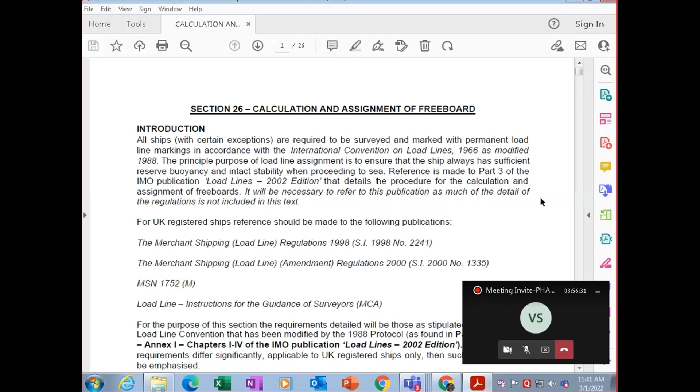Now the exemptions for your load line conventions: basically it's not for the warships. It is not for new ships of less than 24 meters length. It is not for existing ships of less than 150 gross tonnage. Pleasure yachts not engaged in trade, and fishing vessels are also exempted. Plus, exemptions can also be granted, like for your hatchless container vessels where you don't have hatch covers. So those are special exemptions.

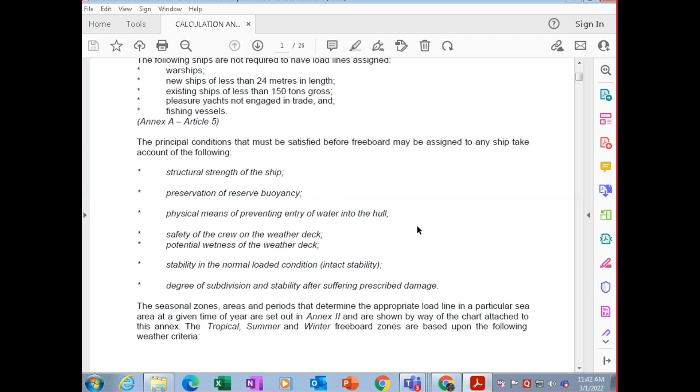Now the principal conditions which have to be satisfied before your freeboard is to be assigned: first, your structural strength should be properly there as per the class. Your reserve buoyancy should be preserved. You should have physical means of preventing entry of water into the hull. There should be safety to the crew on the weather deck.

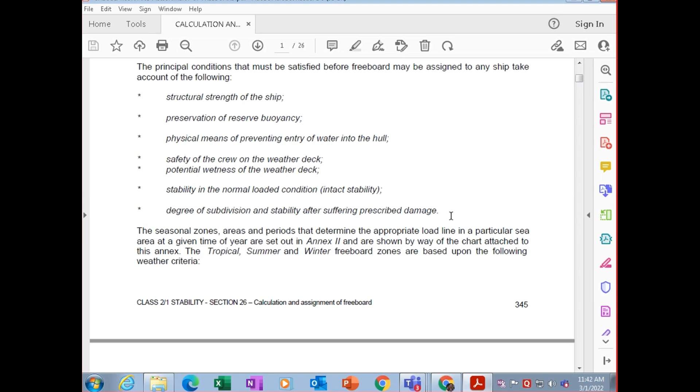The potential wetness on weather deck should be reduced. The stability in normal loaded conditions should be as mentioned in intact stability requirements. Then your degree of subdivision and stability after damage, or damage stability, should be prescribed. What is your damage stability requirement for that? And you should be confirming with that. And your seasonal zones, areas, and periods are to be determined for appropriate load line.

Accordingly, your tropical, summer, and winter freeboards are to be given as per the weather criteria. Your summer zones will be regions where not more than 10% of wind speed is exceeding force 8. Tropical zones are areas where not more than 1% wind speed exceeds force 8, and not more than one tropical revolving storm in a 10-year period occurs in the area of 5 degrees lat-long square in any one separate calendar month.

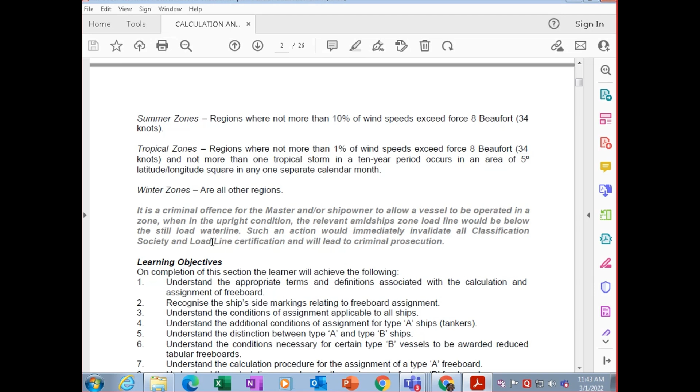And winter zone is all other areas. So your master or ship owner cannot submerge your relevant load line in still conditions, otherwise your class is going to invalidate your certificate, and that will lead to criminal prosecution. You should not submerge the relevant load line below your still load line water.

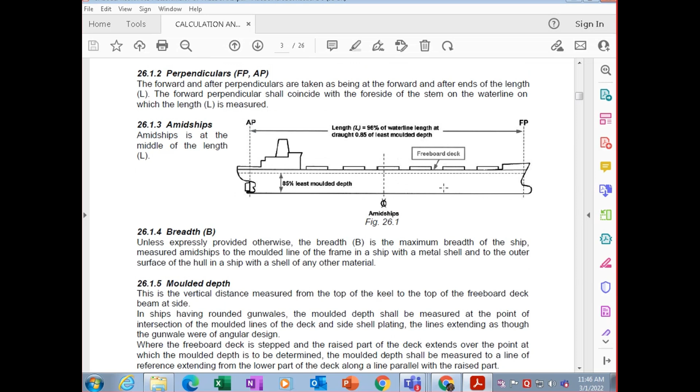B, or your breadth, is the maximum breadth of the ship measured amidships to the molded line of the frame in a ship with a metal shell, and to the outer surface of the hull with the shell of any other material. If it's a metal hull, then it is the molded line of the frame, meaning inside, and if it's any other material, it will be the outer surface of the hull - breadth maximum at midships.

What is molded depth? Molded depth is the vertical distance from the top of the keel. Top of the keel means above the keel, because the keel has a certain thickness, so from top of keel to the top of the freeboard deck beam at the side, not including the thickness - that is taking the thickness of the freeboard deck. So it's the top of the freeboard deck beam at the side.

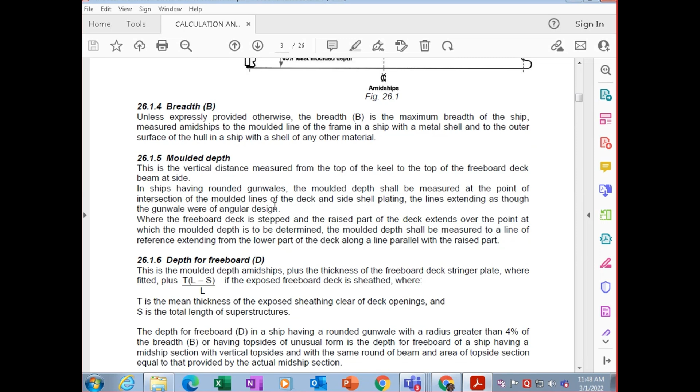So ships having a rounded gunwale, the molded depth shall be measured to a point at the intersection of the molded line of the deck and the shell plating, with the line extending as though the gunwale was an angular design. This means at this intersection, if this line stays straight and this one stays straight, at their intersection this point is where it is located.

Where the freeboard deck is stepped and a raised part of the deck extends over the point at which the molded depth is to be determined, the molded depth shall be measured to a reference line extending from the lower part of the deck along a line parallel to the raised part. So then it should be measured at the upper part - that is the line reference extending from the lower part of the deck to a line parallel to the raised part, and raised there.

Now we come to what is depth for freeboard. So depth for freeboard is molded depth amidships plus the thickness of the freeboard deck stringer plate. Let me tell you what a freeboard deck stringer plate is.

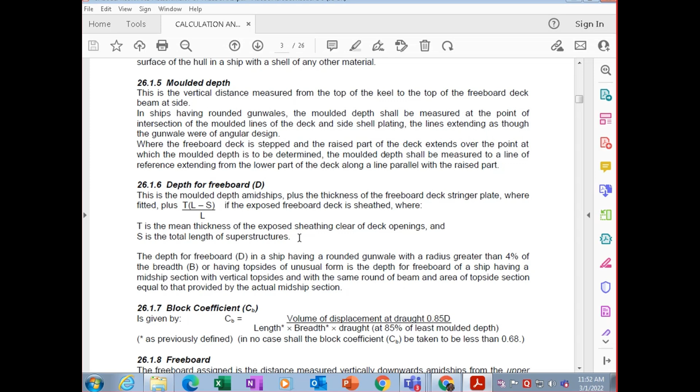Now the depth for freeboard having a rounded gunwale with a radius greater than 4% of the breadth, and having top sides of unusual form - top sides means where a bulk carrier has come, so that's rounded - plus its top side tank is of unusual form, with the depth for freeboard having a midship section of vertical top sides and with the same round of beam, and area of top side section equal to that provided by the actual midship section. So on top of that this difference will come if it has a top side tank.

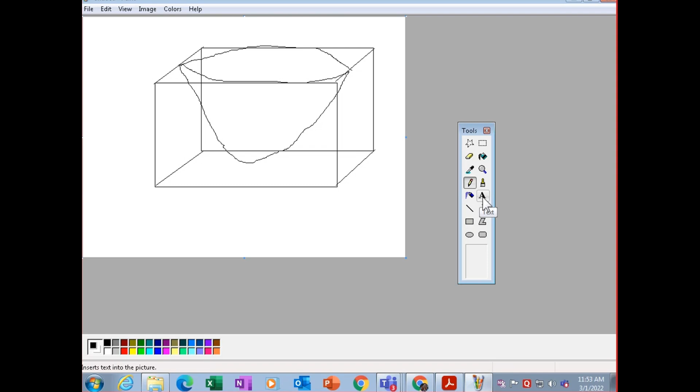लेकिन सपोज मैंने एक VLCC बनाया जिसमें ज्यादा से ज्यादा लकड़ी यूज हुई, तो ब्लॉक कोफिशिएंट हो गया मेरा 0.85। 85% मैंने लकड़ी यूज कर ली बनाने में। तो ब्लॉक कोफिशिएंट का मतलब है मैंने एक लकड़ी के ब्लॉक से कितनी ज्यादा मटेरियल यूज किया वो शिप बनाने के लिए।

पहले मैंने सोचा आपको लेमन वर्ड में समझाऊं, उसके बाद मैं फिर फॉर्मूला पे आऊं।

So block coefficient CB is volume of the displacement at the draft 0.85 of depth. 0.85 of depth मतलब 85% of depth for freeboard divided by LBP, length into breadth into draft, which is at 85% of least molded depth. Draft होगा least 85% of least molded depth.

तो वॉल्यूम ऑफ डिस्प्लेसमेंट एट ड्राफ्ट 0.85। कई लोग आप लोग लिख देते हैं वॉल्यूम ऑफ डेड वेट लिख देते हो, तो वो रॉन्ग हो जाता है, जीरो हो जाता है। सो रिमेंबर इट इज वॉल्यूम नॉट डेड वेट बट डिस्प्लेसमेंट, उसके आगे लिखना पड़ेगा ड्राफ्ट 0.85। अगर ये भी मिस कर दिया तो मार्क्स कटेंगे।

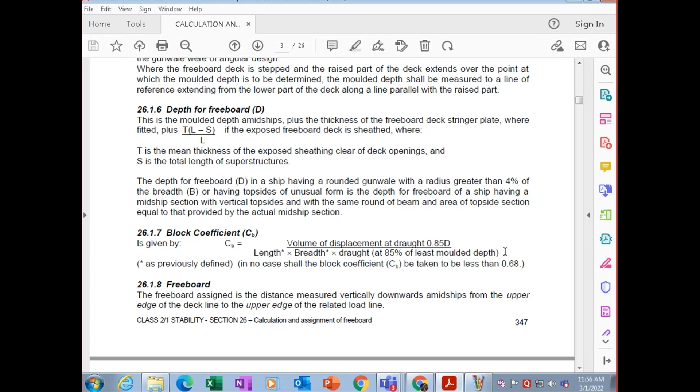अब आता है फ्री बोर्ड। Freeboard assigned is the distance measured vertically downwards from the upper edge of the deck line to the upper edge of the related load line. We're taking from upper to upper.

अब आता है what is freeboard deck? Now this is normally the uppermost continuous deck.

अब कई बार आपका freeboard deck is a bulkhead deck, क्योंकि जहाँ तक आपके bulkheads आ रहे हैं उनको अगर join किया जाए, so that is bulkhead deck because सारे bulkheads को कहाँ join कर रहा है, that is freeboard deck। It can be bulkhead deck also, but freeboard deck हर एक जहाज में अलग अलग भी हो जाता है, कई बार discontinuous freeboard भी हो सकता है, कई बार ro-ro वेसल में अलग से freeboard deck होगा क्योंकि उसमें अलग अलग डेक्स हैं। नॉर्मल शिप पे तो एक ही डेक है, बट ro-ro वेसल्स में अलग अलग डेक्स हैं।

अब उन कंडीशंस में क्या बताते हैं? So normally the uppermost continuous deck exposed to the weather and sea, which has permanent means of closing all openings in the weather part thereof, and below which all openings are fitted with permanent means of watertight closing।

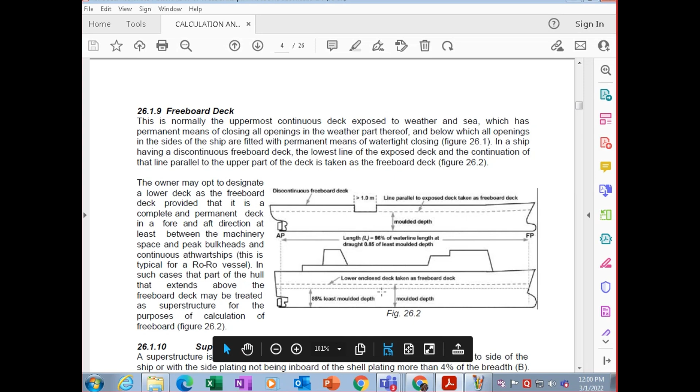We are going to take it as molded depth, not 85%. दिस इज मोल्डेड डेप्थ पे, हम कंटिन्यूस हो, एक बल्कहेड से कंटिन्यूस हो एंड अथवार्ड शिप में कंटिन्यूस हो, तो फिर हम उसको लेंगे एज फ्रीबोर्ड डेक, और उसके ऊपर जो भी डेक हुआ उसको हम सुपर स्ट्रक्चर कंसिडर करके कैलकुलेशन लगाएंगे फॉर फ्रीबोर्ड।

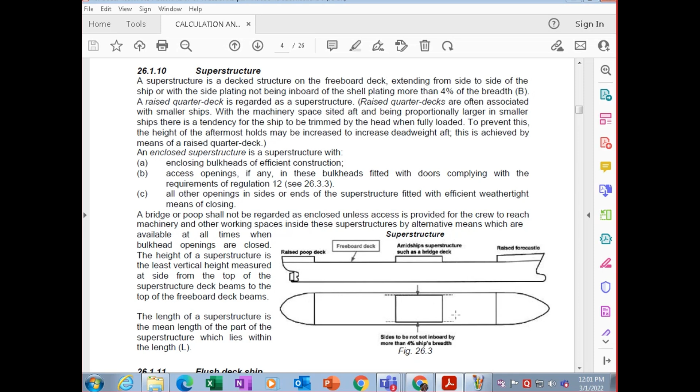Or with the side plating not going inboard of the shell plating by more than 4% of breadth. If it doesn't extend side to side, then the distance coming inboard should not be more than 4% of ship's breadth. Sides are not set inboard by more than 4% of ship's breadth - if we take total ship breadth, this distance should not be more than 4% of it.

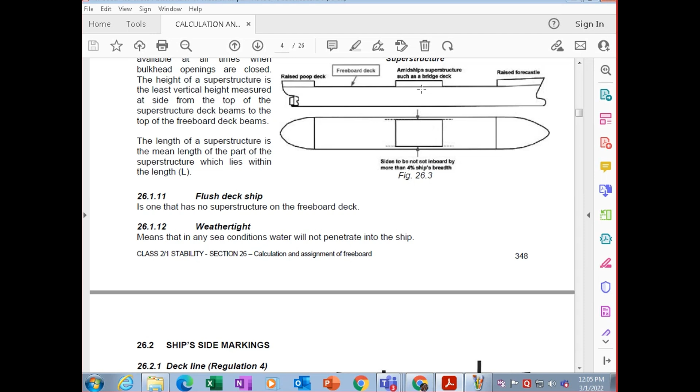तो हम आते हैं डेक लाइन क्या है। ये वाली शीदिंग दी गई है डेक लाइन के ऊपर, यहाँ कोई शीदिंग नहीं है स्टील की है, अगर वुडन शीदिंग दी गई है तो हम ऊपर से लेंगे इसकी डेक लाइन। अगर सिर्फ स्टील है तो इसके ऊपर से लेंगे, अगर लकड़ी भी लगी है तो लकड़ी के ऊपर से लेंगे। Deck line is a horizontal line marked amidships on each side of ship. An upper edge shall normally pass to the point where the continuation outward of the upper surface of freeboard deck intersects the outer surface of the shell plating, जहाँ intersect कर रहा है वहाँ।

Deck line basically 25 mm thickness होती है, इसकी चौड़ाई 300 mm midships पे होगी। However, the deck line may be placed with reference to another fixed point on ship, on condition that the freeboard is correspondingly corrected, and the reference point location and identity of freeboard deck is clearly indicated if there is a rounded radius sheer strake। तो यहाँ sheer strake लगी तो उसमें correction लगी, ये radius है तो इस पे हमने correction लगाई और यहाँ फ्रीबोर्ड डेक मार्किंग correction लगा दी। अगर ये सीधा है तो इसके ऊपर लगा, अगर राउंडेड है तो फिर हमने इससे deduction लगा के correction यहाँ फ्रीबोर्ड डेक मार्क किया।

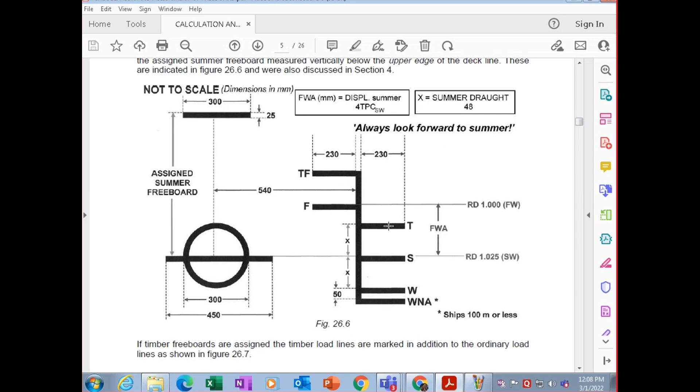इन दोनों के बीच का जो डिस्टेंस है that is X, that is summer draft by 48, और समर एंड विंटर के बीच में भी X is summer draft by 48 डिस्टेंस है। अब ये क्यों है इसका कैलकुलेशन निकला नहीं है। Anybody knows ये summer draft by 48 क्यों है X? ये फॉर्मूला मुझे अभी मिला नहीं है कहीं, इसको किसी को मालूम है कि why X is summer draft by 48? तो अगर कोई ज्यादा रिसर्च कर रहा हो तो उसको मालूम हो तो बता देना, हमको भी कुछ जानकारी चाहिए।

नहीं मालूम किसी को? बड़ा जनरल क्वेश्चन है टिम्बर का - more reserve buoyancy. रिजर्व बॉयंसी ज्यादा है, सीधी बात है, ज्यादा रिजर्व बॉयंसी है इसीलिए इसका फ्री बोर्ड कम है, और ये आगे मार्क होगा, ये पीछे मार्क होगा, ये आपके प्लिम्सॉल मार्क के आगे मार्क होगा और टिम्बर वाला पीछे मार्क होगा।

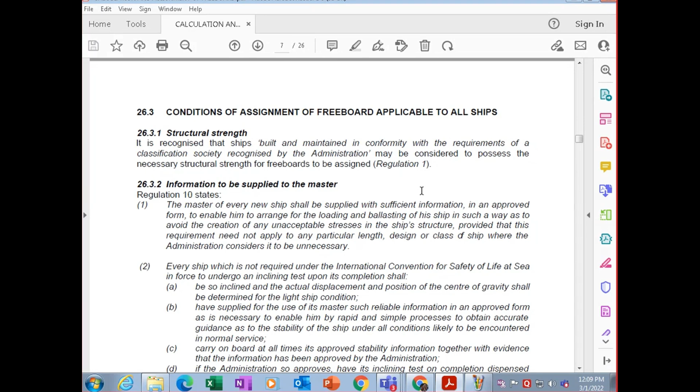अब आ जाते हैं what is the conditions of assignment। तो आपकी structural strength इतनी होनी चाहिए कि आप built and maintain in conformity with the requirements of class recognized by the administration। आपके मास्टर के पास जो information है वो होगा कि master should be supplied with sufficient information in approved form। The form should be approved by the class, approved by your flag state, enable him to arrange for loading and ballasting in such a way to avoid creation of unacceptable stresses।

Provided that this requirement need not apply to particular length design of ship where the administration consider unnecessary। Administration मतलब flag state, अगर उसको unnecessary समझता है तो जरूरत नहीं है, otherwise it should be approved by the flag state। बहुत छोटा जहाज है अगर उसको unnecessary समझता है तो फिर वो उसको discard कर सकता है, उसमें वो mandatory नहीं मारे, otherwise it is mandatory to be approved by the flag state।

Every ship which is not required under the International Convention of Safety of Life at Sea is supposed to undergo an inclining test upon completion. Should be inclined - when does inclining test happen? You have done this in stability. Should be inclined and actual displacement position of CG shall be determined for the light ship condition.

Should be supplied for the use of the master with such reliable information in an approved form to enable rapid and simple process to obtain accurate guidance for stability under all conditions likely to be encountered in normal service. Carry on board at all times its approved stability information together with evidence that it has been approved by your flag state.

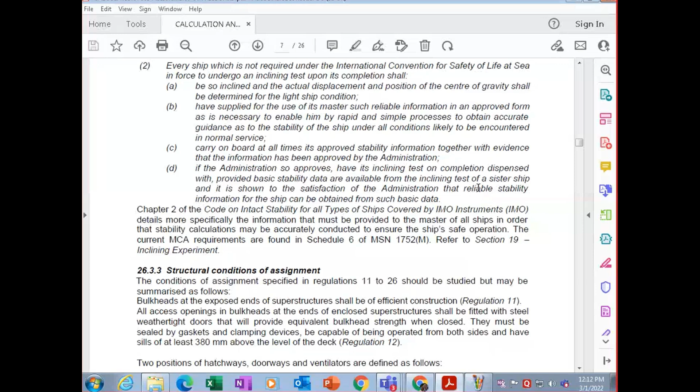The code of intact stability for all types of ships covered in IMO details specifically the information that is provided to the master of all ships for stability calculation to ensure that the ship is safe.

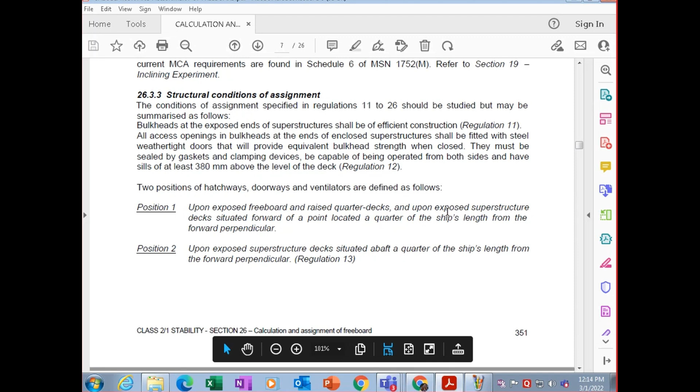From the forward perpendicular, 25% aft is your position 1. So position 1 is the exposed freeboard and raised quarter decks and upon exposed superstructure forward of a point located at a quarter of the ship's length from the forward perpendicular. So we will take this deck, not the poop deck, but this deck, 25% aft of the forward perpendicular.

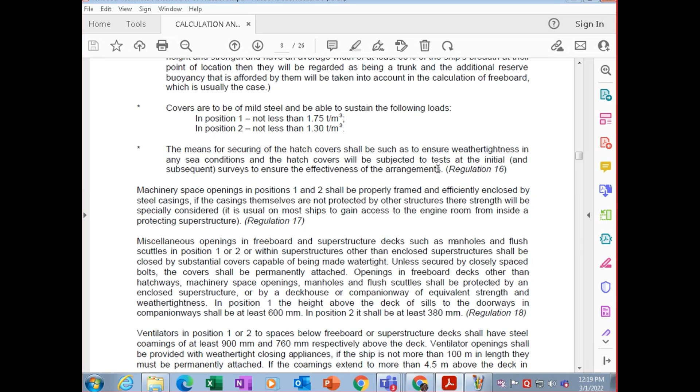Now machinery space opening in position 1 and 2 shall be properly framed and efficiently enclosed by steel casing. If the casing themselves are not protected by other structures, then the strength will be specially considered. It is usual for many ships to gain access to the engine room from inside protective superstructure. So that is your space opening 1 and 2 mein inki framing kya hogi, efficiently close hoga, iski details hum itni zyada isme nahi karenge.

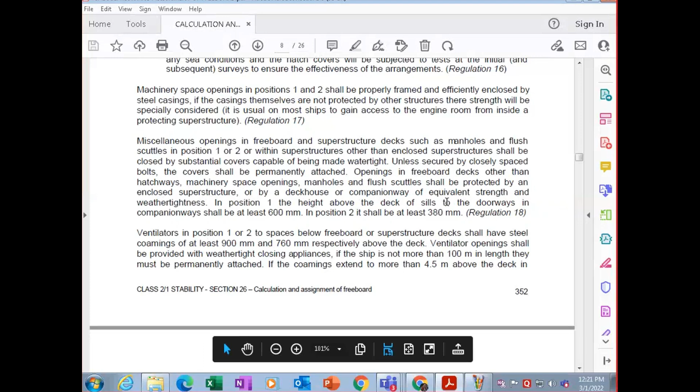So ventilators in position 1 or 2 spaces below freeboard or superstructure deck shall be steel coaming with at least 900 in position 1, itni height hogi ventilator ki, and 760 in position 2 above the deck. Aur isme jo openings hongi that will be provided by weather tight closing appliances. If the ship is not more than 100 meter in length, they shall be permanently attached. To jo bhi aapki closing appliances hongi, agar wo 100 meter se zyada hai to permanently attached nahi hongi, wo side mein rahengi. Lekin jo not more than 100 meters in length hai wo permanently attached.

If the coamings extend more than 4.5 meters above deck in position 1, then they do not need to be fitted with closing arrangements in the ventilator. Aur agar coaming ki height 2.3 hai in position 2 aur iske upar aapka ventilator laga hai, to phir usme bhi aapki closing arrangement nahi hogi unless flag state batata hai.

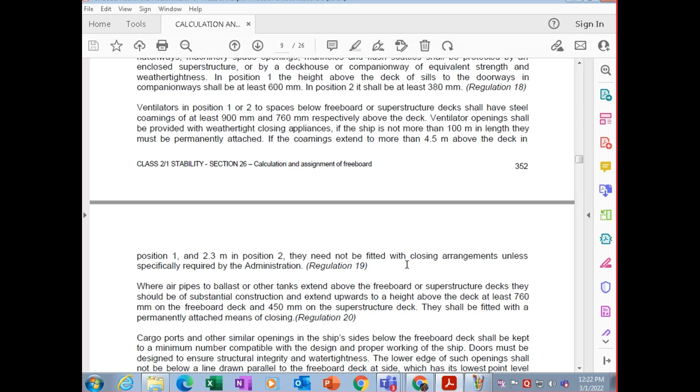अब आता है एयर पाइप्स टू द बैलेस्ट एंड अदर टैंक्स, एक्सटेंडेड अबव फ्रीबोर्ड एंड सुपरस्ट्रक्चर डेक, शैल बी सब्सटैंशियल construction and extend up to height above the deck, at least 760 mm on freeboard deck and 450 mm in the superstructure deck. इनमें permanently closing means होने चाहिए एयर पाइप में।

अभी हमने वेंटिलेटर की बात की थी, अब एयर पाइप्स की बात कर रहे हैं। इनमें पोजीशन 1, 2 नहीं है। इनमें दिया है कि अगर वो डेक के ऊपर है तो उसकी हाइट 760 mm होगी, और अगर वो सुपरस्ट्रक्चर डेक पे है तो 450 mm होगी, और इनके साथ परमानेंटली अटैच्ड मींस ऑफ क्लोजिंग होगी एयर पाइप में।

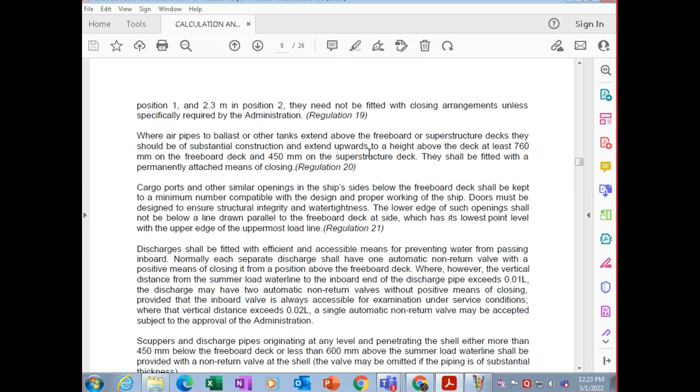नॉर्मली एयर पाइप्स के अंदर आपका बॉल होता है so that पानी अंदर ना आए, so that becomes a non-return valve जो permanently means of closing है।

अब आते हैं what are cargo ports. Cargo ports and other similar openings in ship side below the freeboard deck shall be kept to a minimum number compatible with the design and proper working of ship. Doors may be designed to ensure structural integrity and watertightness. The lower edge of such opening shall be not below the line drawn parallel to the freeboard deck, at the lowest point level with the upper edge to the uppermost load line. That's for the cargo ports.

आते हैं discharges. So discharges shall be fitted with efficient and accessible means of preventing water from passing inboard. Normally, each separate discharge shall have one automatic non-return valve with positive means of closing it from a position above freeboard deck.

Where, however, the vertical distance from summer load line to the inboard end of the discharge pipe exceeds 0.01 L, the discharge will have 2 automatic non-return valves without positive means of closing. Otherwise एक होगा with positive means of closing, अगर उनके बीच vertical distance exceed हो गया 0.01 L से ज्यादा, then 2 automatic non-return valves होंगे without positive means of closing, provided the inboard valve is always accessible for examination under service conditions। अगर वो vertical distance 0.02 L exceed कर रहा है, then single automatic non-return valve को भी accept कर सकते हैं।

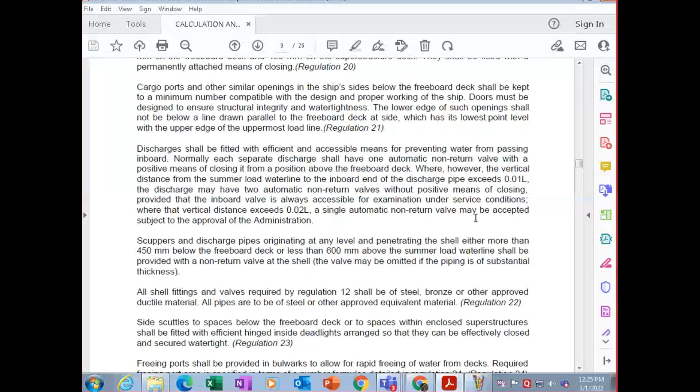अब आता है scuppers and discharge pipes originating at any level, penetrating the shell more than 450 mm below freeboard deck or less than 600 mm above the summer load line, shall be provided with non-return valves at the shell। अगर पाइपिंग सब्सटैंशियल थिकनेस की है, then वे वाल्व की जरूरत नहीं होती, and the valve may be omitted।

All shell fittings and valves required by regulation 12 shall be of steel, bronze or approved ductile material, and pipes जो होंगी approved equivalent material की।

Side scuttles जो भी आपके port holes हैं, to spaces below freeboard deck and/or spaces within the enclosed superstructure shall be fitted with hinged inside deadlights, arranged so that they can be effectively closed and secured watertight।

Now what is a deadlight? आपको एक बार पहले ही बताया था कि जब आपके पोर्ट होल्स बने होते हैं, इसके ऊपर अगर हमने एक कवर लगा दिया so that लाइट ना आए, और इसमें हमारे क्लोजिंग मीन्स है ऊपर और नीचे, पोर्ट होल के ऊपर एक कवर है जो आपने पोर्ट होल के ऊपर देखा होगा, ये कवर होता है, उसको एक्स्ट्रा प्रोटेक्शन देता है, that is known as deadlight। इसका मतलब आपने इसको बंद किया तो आपके कमरे में कोई लाइट नहीं आएगी, that is known as deadlight। जैसे हम लोग पर्दा लगाते हैं, पर्दे से लाइट नहीं आएगी, तो आपके कैबिन में तो पर्दा है, लेकिन पोर्ट होल्स के आगे आपका डेडलाइट दिया जाता है, ताकि बिल्कुल लाइट ना आए, that is deadlight।

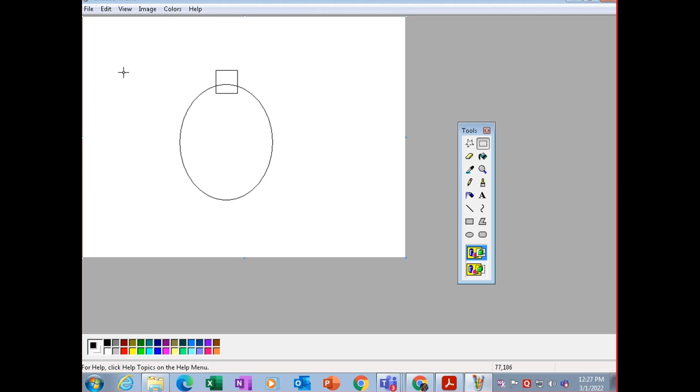तो फ्रीइंग पोर्ट जो है, फ्रीइंग पोर्ट क्या चीज है वो आपको बता देते हैं। व्हाट इज अ फ्रीइंग पोर्ट? ये बुलवर्क के नीचे होता है फ्रीइंग पोर्ट। तो सपोज ये आपका मेन डेक है और इसके ऊपर हमने एक बुलवर्क लगाया है, उसके बाद आपकी रेलिंग्स आ गईं।

अब बुलवर्क के नीचे जो पानी इकट्ठा हो जाएगा, तो उसके नीचे एक ओपनिंग होती है। इससे पानी नीचे से निकल सकता है, वरना डेक पे इकट्ठा हो जाएगा और दैट कैन अफेक्ट योर स्टेबिलिटी। इसलिए ज्यादातर रेलिंग्स लगी होती हैं कि पानी निकल जाए। कई बार इसमें हिंज लगी होती है, कई बार ये ओपन रहता है, इसको हम कहते हैं फ्रीइंग पोर्ट। दिस इज अ फ्रीइंग पोर्ट ऑन डेक।

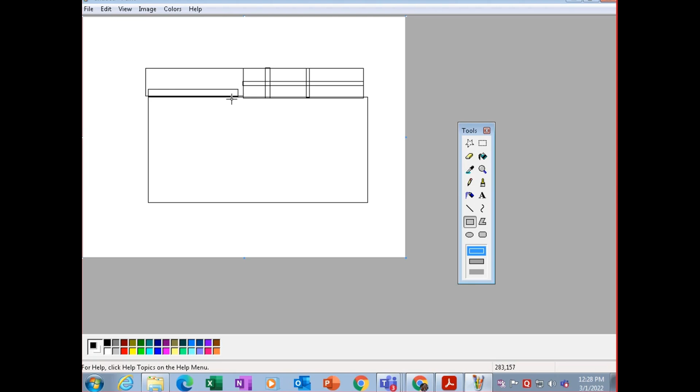So freeing ports shall be provided in bulwarks to allow for rapid freeing of water from deck. Required freeing port area is specified in a formula - ये अलग formula है इसका।

Then protection of crew should be ensured for the provision of efficient guardrails or bulwark which are to be fitted on all exposed freeboard and superstructure decks. They should be at least 1 meter in height from the deck. In the case of guardrails, the opening below the lowest course of guardrail shall be not exceeding 230 mm, and the rail shall be not more than 380 mm apart.

Special provision including lifelines, जो safety lines लगी होती हैं deck पे, shall be fitted for allowing crew safe access from and to all parts of the ship during normal operation, which includes access in the way of deck cargoes also। तो अभी तक ये करा दिया है।

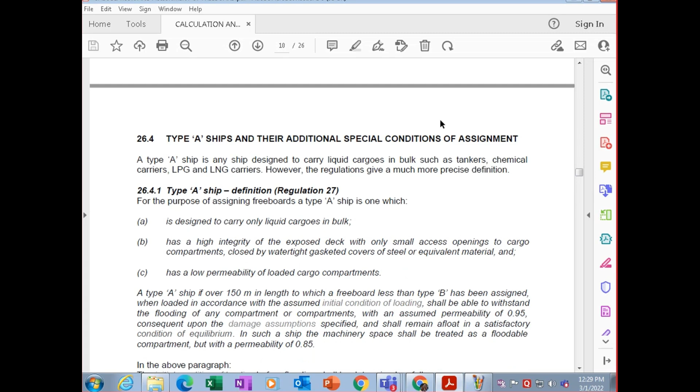अब we'll come to टाइप A, टाइप B एंड व्हाट इज परमेबिलिटी, B100, B60 सब करेंगे। आज के लिए तो काफी हो गया।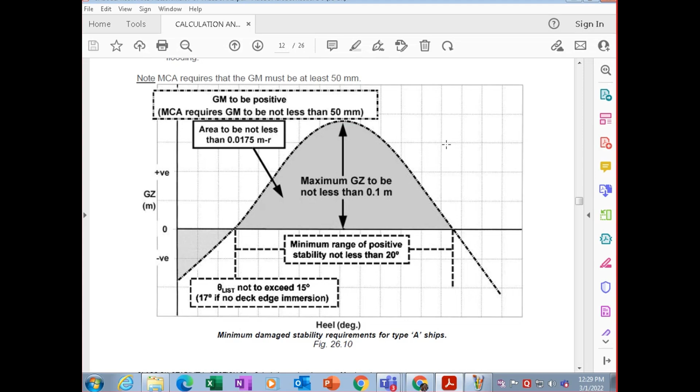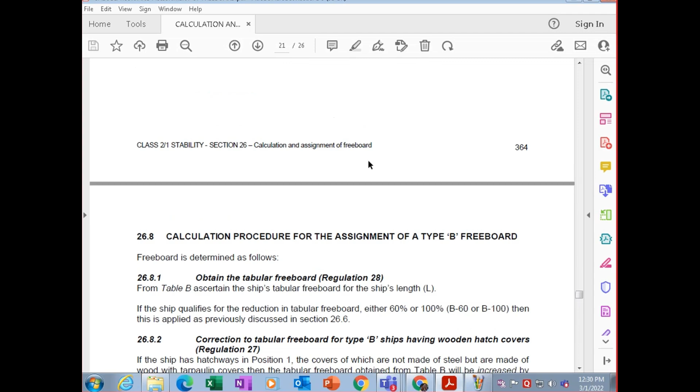देन आपका इनिशियल लोडिंग कंडीशन क्या होगा, कंडीशन इक्विलिब्रियम क्या है, ये आपका डैमेज स्टेबिलिटी रिक्वायरमेंट्स ऑफ शिप आ जाता है। देन टाइप A क्या है, then distinction between type A and type B, and then your B60 B100 क्या है, then B60 का additional freeboard requirements and B100 का additional requirements। We will do यहाँ टिम्बर भी आएगा - नहीं, इसके बाद टिम्बर का हम लोग छोड़ देंगे, टिम्बर नहीं करेंगे। we'll do all that - शेयर का कैलकुलेशन, ये कैलकुलेशन, एंड B का कैसे कैलकुलेशन करेंगे, टिम्बर फ्रीबोर्ड को छोड़ देंगे।

तो काफी इसमें रट्टा मारना पड़ता है टनेज में, लोड लाइन में काफी रट्टा मारना पड़ेगा आप लोगों को। कई बार क्वेश्चन 25 का आता है, कई बार 50 का आता है, डिपेंडिंग। 25 का तो आता ही है, बट यहाँ चॉइस है तो आप लोग छोड़ देते हो ज्यादातर।

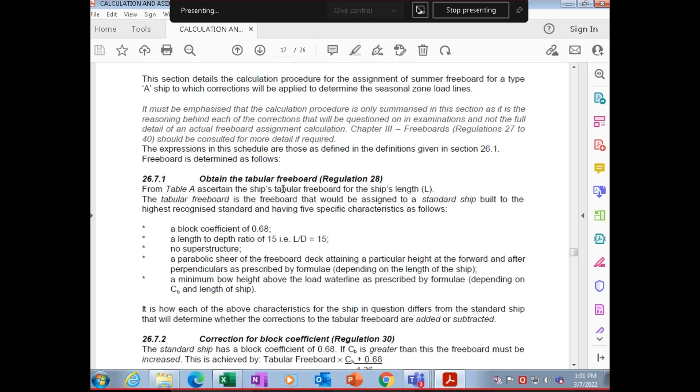Good afternoon. So we'll continue with your tonnage - how do you assign this type A freeboard after you get it from tabular? So basically, tabular freeboard is given in regulation 28 of the Loadline rules, and you'll get your tabular freeboard basis your length of the ship. Now, tabular freeboard is basis standard ship, which as per load line has got various characteristics.

So they've got 5 characteristics which we take into account. First is your block coefficient, which should be 0.68 - that is basis standard ship, and the tabular freeboard is basis standard ship. L by D, that is length to depth ratio, is equal to 15. This parameter is taken for a standard ship. For a standard ship, there is no superstructure - that means whatever superstructure we get, we have that correction.

अभी इसका question कभी आया नहीं है कि as per tabular freeboard describe or write down the specific characteristics of a standard ship। This is the question - now this question has not come, but if it comes, then you have to write about these features।

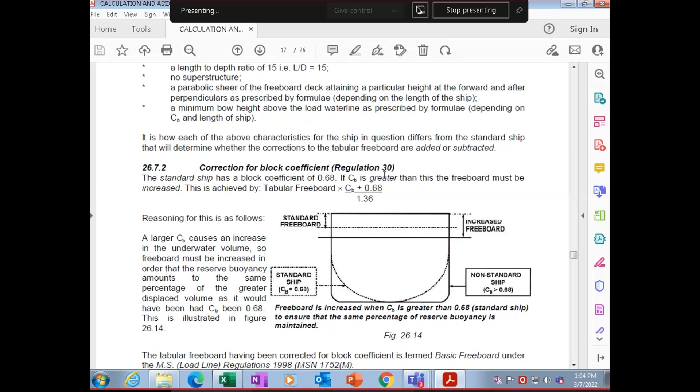So if you have a standard vessel, which is this rounded vessel, maybe a general cargo ship, then the sinkage will not be as much as compared to a non-standard ship where your block coefficient is more than 0.68. So in that case, you have to increase the freeboard because the sinkage is more.

So larger CB means increased underwater volume. When your underwater volume increases, the freeboard must be increased so that your reserve buoyancy amounts to the same percentage of greater displaced volume, as this would be for CB 0.68. Because if your underwater volume is more, the volume displaced will also be more. When the volume displaced is more because of more underwater volume, then the vessel is going to sink more. If it sinks more, to compensate, we have to increase the freeboard.

That is the reason why if you have more than 0.68 block coefficient, you have to increase the freeboard with the correction. That is number one. So you have to explain this with your correction for block coefficient, using this diagram and formula, to explain why freeboard is increased for non-standard ships greater than 0.68.

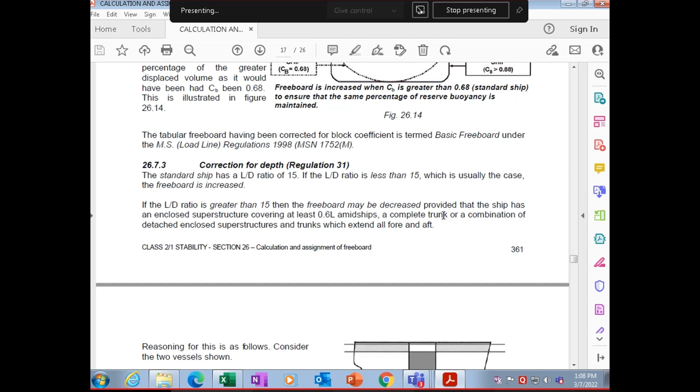Now, why is the reason that if L by D is less than 15, we have to increase the freeboard? And why, if L by D is more than 15, can we decrease the freeboard? So here are two diagrams to explain.

If L by D is less than 15, suppose your length is less and depth is more. So if you have one compartment flooded, you will have greater sinkage and loss of freeboard in this kind of vessel, because the reserve buoyancy from the other compartments will not compensate for the lost buoyancy of this compartment. So there you have to increase the freeboard to compensate for the loss of buoyancy, which should be at least equal to the reserve buoyancy of these two intact compartments.

Now, in case L by D is greater than 15, suppose this compartment is flooded. So you have a volume of lost buoyancy, this one, and the reserve buoyancy gained by the other compartments is this one. Now this will be more than that — the volume of buoyancy gained by the other compartments will be more than the loss by one compartment.

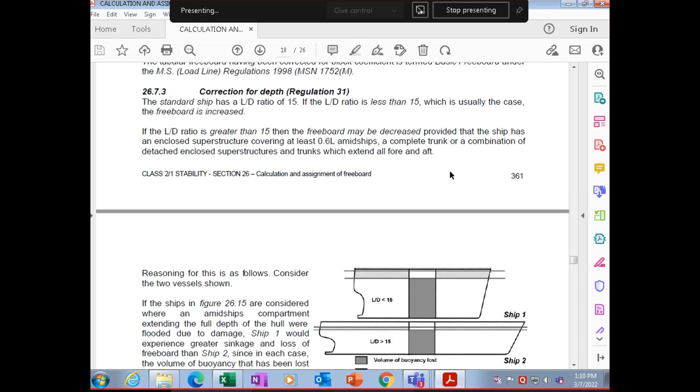So there you can decrease the freeboard, provided of course you have an enclosed superstructure covering 0.6L, a complete trunk, or a combination of detached enclosed superstructure and trunk extending fore and aft. So in figure 26.15, consider an amidships compartment extending the full depth of the hull, flooded due to underwater damage. Ship 1 will experience more sinkage and loss of freeboard compared to Ship 2, because here you have more buoyancy gained compared to lost. So these were the two conditions for correction.

Now we have another correction, which is the position of the deck line.

Now, if the actual depth of the upper edge of the deck line is greater or less than the depth for freeboard, the difference, if greater, shall be added, and if less, should be deducted from freeboard.

Suppose the actual depth to the upper edge of the deck line is greater than the depth for freeboard, or D. Then that difference will be added to the freeboard, so your freeboard has to be increased.

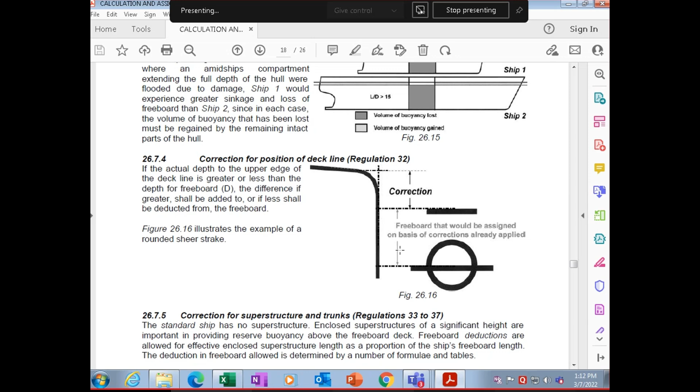Normally, if your deck line is supposed to be here with rounded sheer, then the deck should be at this position, so that correction is given. That correction should apply when the actual depth to the upper edge is more than D, then you have to add that correction; otherwise, it should be subtracted.

Now we come to number 4, correction for superstructure and trunk. Then you have correction for sheer, and then you have correction for bow height.

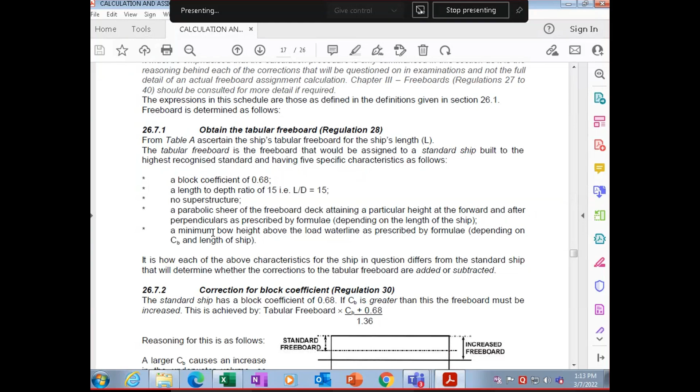So for the standard ship, as we had seen, the condition of a standard ship has 5 basic requirements which we have done: block coefficient 0.68, L by D of 15, no superstructure, parabolic sheer, and minimum bow height. So we are considering no superstructure as the standard ship.

So every ship will have a superstructure, so the correction will be a deduction. Whatever superstructure you have, your reserve buoyancy is increased, so your freeboard will be deducted from your tabulated freeboard. The standard ship has no superstructure.

Enclosed superstructures of significant height are important in providing reserve buoyancy above the freeboard. So the freeboard deductions are allowed for effective enclosed superstructure length as a proportion of the ship's freeboard length, and the deduction in freeboard allowed is determined by a number of formulas and tables.

That formula is not here, but we'll do that formula separately, along with other notes. So let's see where the formula is. This is the freeboard correction formula for superstructure.

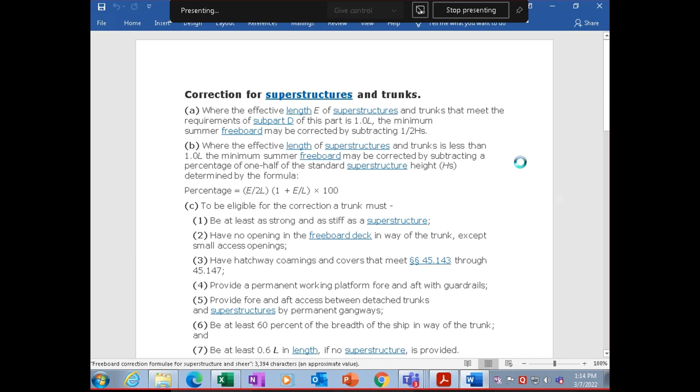So first we'll do this correction and then we'll go to the other notes. Where the effective length of superstructure is E, and the trunks that meet the requirement of subpart D of this part is 1L, the minimum summer freeboard will be corrected by subtracting half HS. We'll come to what HS is. The formulas are given as per Simpson's rules here, 1-3-3-1, those factors are there.

This is shear correction, so that shear correction will be as per this Simpson's rule. This will be your percentage for correction of length of superstructure.

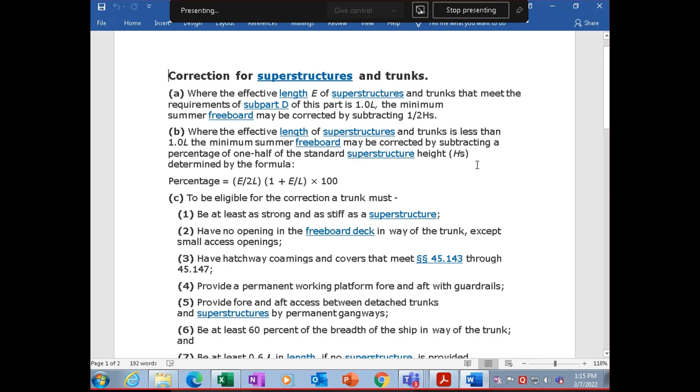Now, when the effective length of superstructure and trunk is less than 1L, freeboard may be corrected by subtracting a percentage of half the superstructure height, which is half your HS. The percentage is E by 2L into 1 plus E by L into 100. That correction will be eligible for correction of trunk.

A trunk can be taken as superstructure if it is at least as strong and stiff as a superstructure, if there is no opening in the freeboard deck in the way of trunk except small access openings, if it has hatch coamings and covers that meet requirements, and if it provides a permanent working platform fore and aft with guardrails.

Provide a permanent working platform fore and aft with guardrails, and fore and aft access between detached trunks and superstructure by permanent gangway. Your trunk should be at least 60% of the breadth of the ship in way of the trunk and should be at least 0.6L in length. If no superstructure is provided, then the trunk should be 0.6L. Then the trunk can be taken as superstructure.

Rule 33 defines the standard height of superstructure as per table.

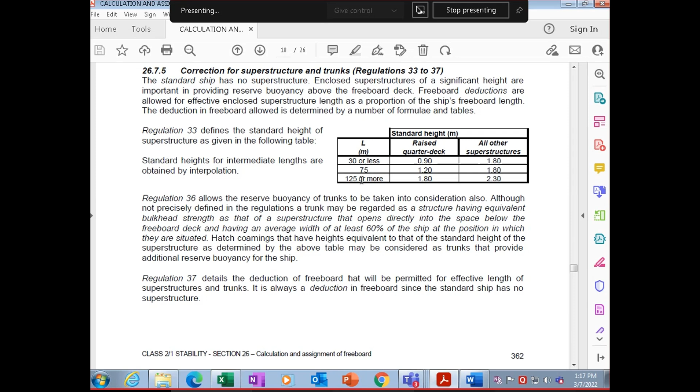Standard height, raised quarterdeck in meters: for 30 meter length or less, it is 0.9, and all other superstructure is 1.8. At 75 meters it is 1.2 for raised quarterdeck, and all other superstructure is 1.8. At 125 meters or more, it is 1.8 for raised quarterdeck, and 2.3 for other superstructure. Anything between 75 to 125 you find by interpolation.

Regulation 36 allows a reserve buoyancy of trunks to be taken into consideration also, and there are conditions under which the trunk can be taken as superstructure for correction. There are 7 points.

Although not precisely defined, regulation says the trunk may be regarded as a structure having equivalent bulkhead strength as the superstructure that opens directly into space below the freeboard deck, and having average width of at least 60% of the breadth of the ship at the position in which they are situated. Hatch coaming shall be of height equivalent to the standard height of superstructure as determined by the table. They may be considered as trunks provided additional reserve buoyancy is provided for the ship.

Details of regulation 37: deduction of freeboard permitted for effective length of superstructure and trunks. There should be a deduction in freeboard since the standard has no superstructure, so whenever you have a superstructure, that height will be taken for deduction in freeboard. Those formulas are there.

Now we have the shear profile. Shear is basically, suppose white is taken as a standard shear profile of the vessel. That's how the standard shear, the white section, is taken.

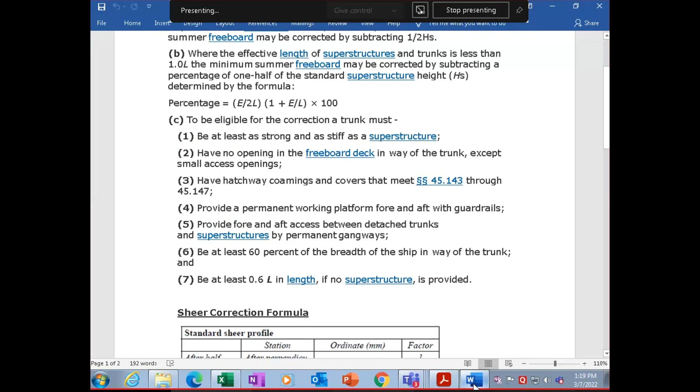If it is excess, more shear, then your freeboard has to be deducted because more reserve buoyancy is there. And if there is less than the white one, so if you are in the next section, the gray one, then that means your shear is less, so your reserve buoyancy is less, so additional freeboard has to be there. So correction is to be added as per the Simpson's rules, which are these.

You have these formulas calculated and then you find out what is your correction for the shear. So the formula at aft perpendicular is taken as 25 into L by 3 plus 10, in mm.

Your factor is 1. At L by 6 from aft perpendicular it is 11.1, and the factor is 3, where you multiply. Then at L by 3 from aft perpendicular it is 2.8 into L by 3 plus 10, and factor is 3 for multiplication. Midship is taken as 0, so factor 1, and again this factor will be 0.

So you add those factors and find out the correction in mm. At L by 3, it is 5.6 into L by 3 plus 10, factor 3, and at L by 6 from forward perpendicular you take the distance from aft to midships and then from forward to midships. So again you multiply that and find mm, and that's your shear correction.

And if your shear is more than your standard profile, then you have to subtract from your freeboard and you get less freeboard. If you have less, then you add.

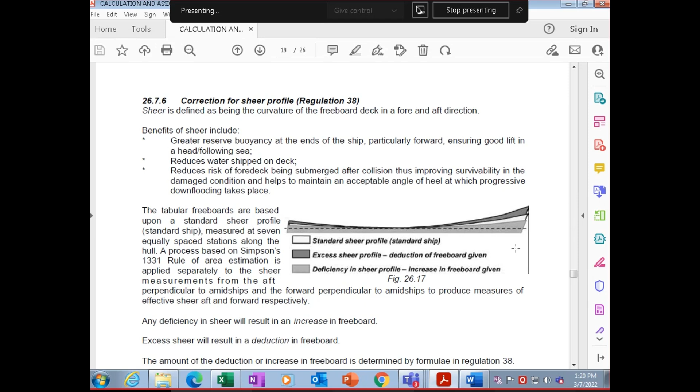Now, what are the benefits? What is shear? Shear is basically the curvature of the freeboard deck in the fore and aft direction, so how high or low it is. Shear is required so that shipping of seas from forward is reduced, and aft is reduced. Aft shear is half, because forward green seas are coming more as compared to the pooping part.

So what are the benefits of shear? There is greater reserve buoyancy at the ends of the ship, particularly forward, ensuring good lift in a head sea. You have reserve buoyancy, so whenever the sea comes forward, you can lift easily. It reduces water shipped on deck, reduces risk of foredeck being submerged after collision, thus improving survivability in the damaged condition, and helps maintain acceptable angle of heel when progressive down-flooding takes place.

Your tabular freeboard is based upon the standard shear profile, measured at 7 equally spaced stations, which we have done here: 7 stations.

A process based on Simpson's rule of area estimation, 1-3-3-1, is applied separately to the shear measurements from aft perpendicular to midships, and then forward perpendicular to midships, to produce measures of effective shear aft and forward.

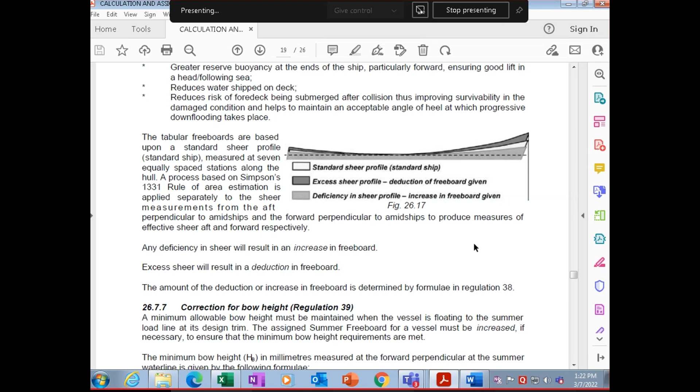Any deficiency in shear will result in an increase in freeboard. Excess shear will have a deduction in freeboard. That amount is as per the formula.

Then we come to correction for bow height. There are 2 ways of correction of bow height: one is when you have a raised bow height, or if you have a minimum shear at the distance where the minimum shear is achieved. So there are 2 conditions in that.

You have to write both conditions, not one. Normally you write only one condition and the marks are cut. So in addition to the formula, you have to write both conditions for correction of bow height. Minimum allowable bow height should be maintained when the vessel is floating to summer load line at the design trim.

The assigned summer freeboard for vessel must be increased if necessary, if your minimum bow height requirements are not met. The bow height is required because otherwise you'll be shipping seas and not draining seas. That means water is going to collect on deck, and your additional displacement will be there with the water added, meaning you're going to submerge. That's why if your bow height is less, you have to add; if bow height is more, then you can subtract.

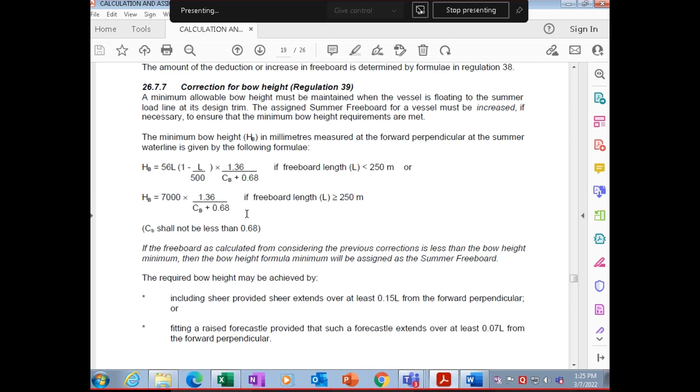Now, in case your freeboard length is greater than or equal to 250, then HB or minimum bow height will be 7000 into 1.36 divided by CB plus 0.68, and CB in no case will be less than 0.68.

So if the freeboard calculated after considering previous corrections is less than the bow height, then the minimum bow height formula value will be assigned as summer freeboard.

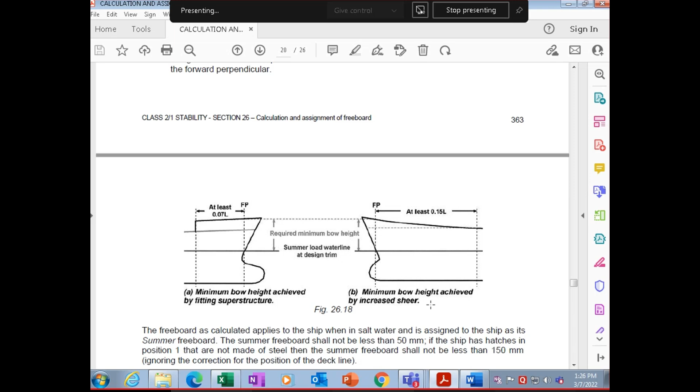So required bow height can be achieved in two ways. One is extending, in this condition, where your bow height is increased for length at least when you're fitting a superstructure here in the bow. So minimum bow height here should be at least 0.07 or 7% of L or LBP from forward perpendicular. Second condition is by increasing your shear for at least 15% length from the forward perpendicular. So either you're raising the bow height by fitting a superstructure, or increasing bow height for a certain distance by increased shear of at least 0.15.

So the freeboard calculated applies to the ship when in salt water and is assigned to the ship as its summer freeboard, and summer freeboard should not be less than 50 mm in any case. If the ship has hatches in position 1 and they are not made from steel, then the summer freeboard shall not be less than 150 mm, ignoring the correction for the position of the deckline.

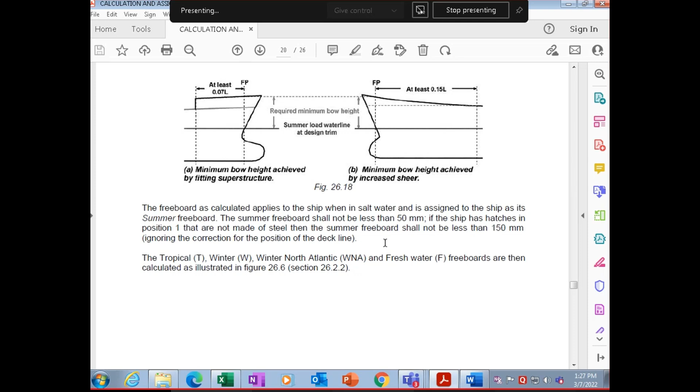Then your tropical, winter, North Atlantic, and freshwater freeboards are calculated after your summer freeboard is calculated.

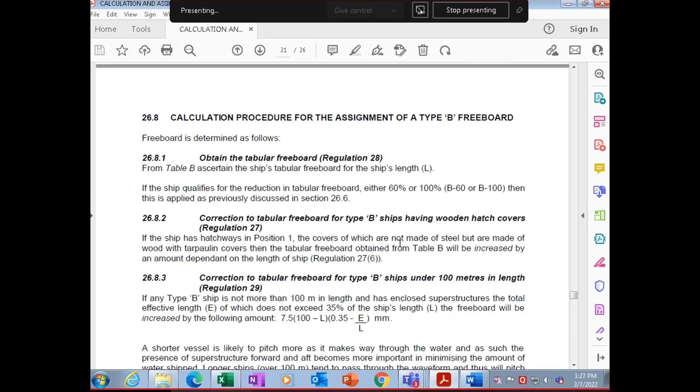Now, how will you do the corrections for type B freeboard? So you are obtaining type B from your ship's tabular freeboard, which is regulation 28 as per the length. So if the ship qualifies for reduction in tabular freeboard, either B60 or B100, then you will be applying corrections as per the 6 corrections.

These are additions in case you have tabular freeboard for type B ships having wooden hatch covers, and there's a correction there. So if the ship has the hatchways in position 1, and the covers are not made of steel but of wood with tarpaulin, then the tabular freeboard obtained from B will be increased by an amount dependent on the length of ship. That is another addition given as per 27.6: if you have wooden hatch covers, then your freeboard is to be increased as per the specification given, based on length of ship.

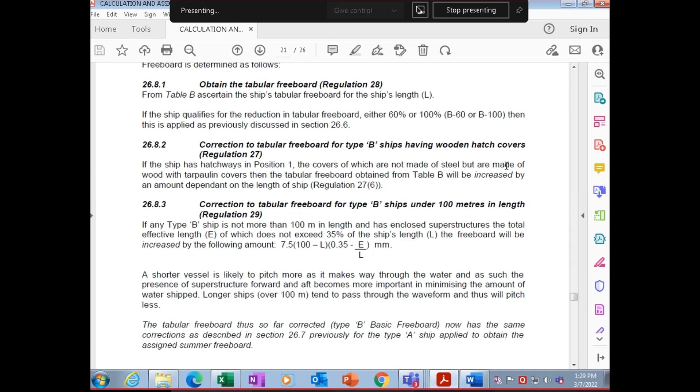There's an addition to the 6 corrections for type B ships having wooden hatch covers. The second part for type B vessel is, in addition to the 6 corrections, if it is under 100 meters in length...

...not more than 100 meters, so less than or equal to 100, and has enclosed superstructure with total effective length E which does not exceed 35% of the length, then the freeboard will be increased, amounting to 7.5 into (100 minus L) into (0.35, that is 35% of ship's length, minus E, effective length of superstructure), divided by L, in mm. So that will be the increase in freeboard if your type B vessel is less than or equal to 100 meters length. This formula will be applied and added to your freeboard.

So that addition of freeboard will be this amount.

A shorter vessel is likely to pitch more as it makes way through the water, and as such the presence of superstructure forward and aft may be very important in minimizing the amount of water shipped on board. That is why you have an increase in freeboard. For longer ships, over 100-meter length, they tend to pass through the waveform, and therefore the pitching will be less.

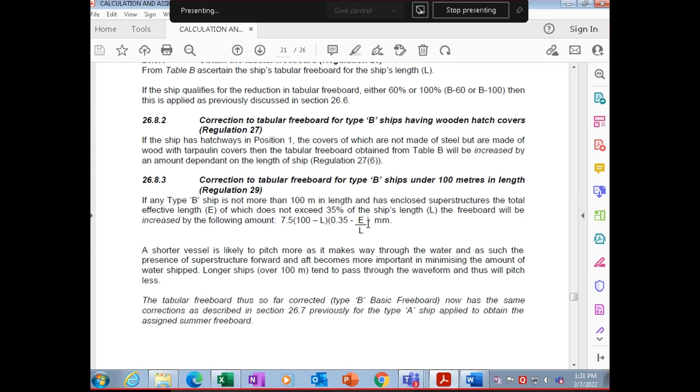In case of wooden hatch covers, you have to have additional freeboard as per regulation 27.6. In case the vessel is less than or equal to 100 meters in length, then you have addition in freeboard as per 7.5 into 100 minus L, into 0.35 minus E by L, in mm. We will not do timber freeboards.

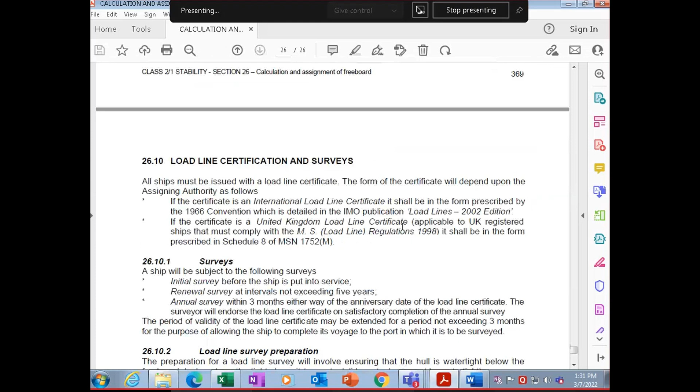Now we'll come to what are the load line certifications and surveys.

So the ship must be issued with a load line certificate, and the international load line certificate must be in the form prescribed. And the surveys here for load line will be an initial survey, whenever you're purchasing a ship or it's first put into service, maybe after manufacturing or after sea trials, then you have to have an initial survey.

Renewal survey not exceeding 5 years, within 3 months of expiry. Annual survey within 3 months plus or minus of the anniversary date of the load line certificate. The endorsement will be done on your load line certificate after all the surveys are done. Validity of the load line may be extended for a period not exceeding 3 months for the purpose of allowing the ship to complete its voyage, so that extension can be given after application.

Now how do you prepare a vessel for load line? In load line, the first thing checked is the watertight integrity of the vessel. Is the hull watertight below your freeboard deck and weathertight above it?

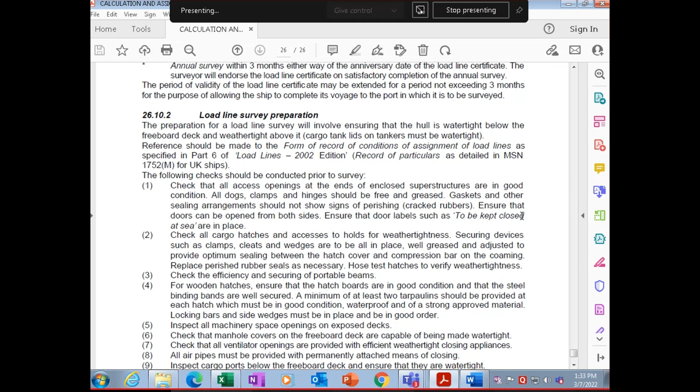So your checks before survey will be: all access openings at the ends of enclosed superstructure should be in good condition. All your dogs, clamps, and hinges should be free and greased. Gaskets and other sealing arrangements should not show signs of perishing. Ensure that doors can be opened from both sides. Ensure that door labels such as 'to be closed' are kept in place.

Check all your cargo hatches and accesses to holds for weather tightness. Securing devices like clamps, cleats, wedges should be in place, well greased, and adjusted to provide optimum sealing between hatch covers and the compression bar on the coaming. Replace perished rubber seals as necessary. Hose test hatches to verify weather tightness.

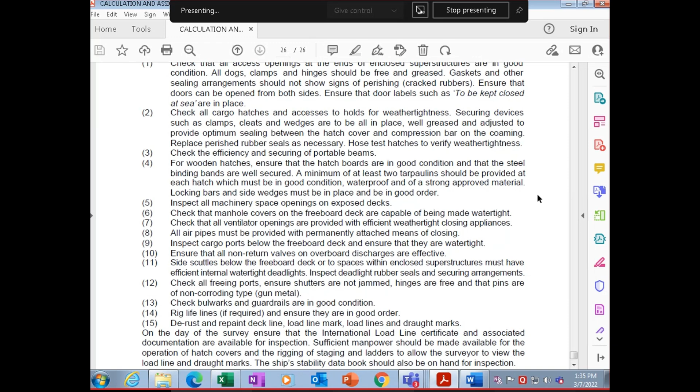Number 3 is efficiency in securing of portable beams, that is for vessels which do not have hydraulic, mechanical opening of hatches or steel hatches. For wooden hatches, ensure that the hatch boards are in good condition and that the steel binding bands are well secured. A minimum of at least 2 tarpaulins must be provided on each hatch. They must be in good condition, waterproof, strong, and of approved material. Locking bars and side wedges should be in place and in good order.

Inspect all machinery space openings on exposed decks. Check the manhole covers on the freeboard deck are capable of being made watertight. Check that all ventilator openings are provided with efficient, weathertight closing appliances. All air pipes must be provided with permanently attached means of closing.

Inspect cargo ports below the freeboard deck and ensure that they are watertight. Ensure that all non-return valves on overboard discharges are effective. Side scuttles or portholes below the freeboard deck, or in spaces within enclosed superstructure, must have efficient internal watertight deadlights. Inspect the rubber seals and securing arrangements.

Check your freeing ports, which are below your bulwarks. Ensure shutters are not jammed, hinges are free, pins are non-corroding type. Check the bulwarks, guardrails are in good condition. Rig lifelines and ensure that they are in good order. Derust and repaint deck line, load line mark, and draft marks.

On the day of survey, ensure that the international load line certificate and associated documentation are available. Sufficient manpower should be available for operation of hatch covers and rigging of staging and ladders to allow the surveyor to view the load line marks and draft marks. Your stability data book should also be available for inspection.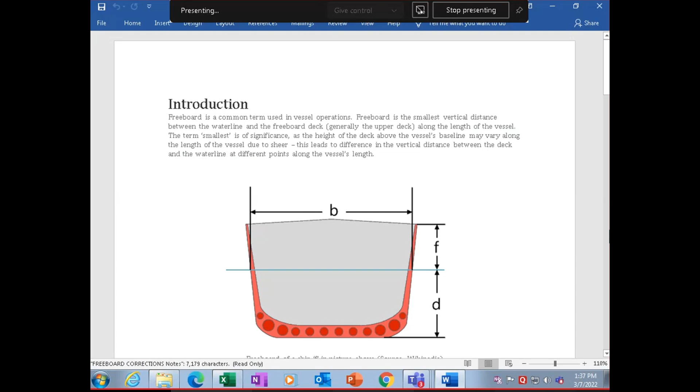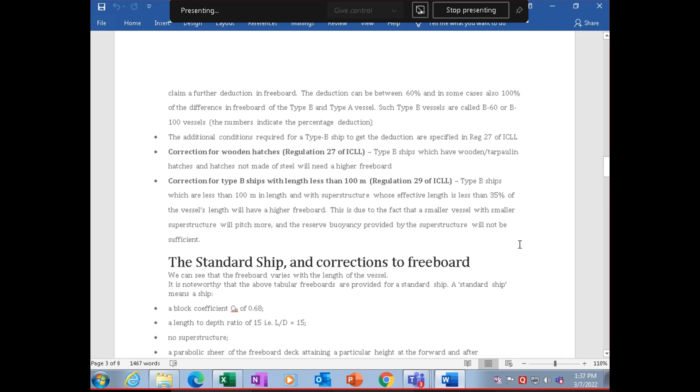Now, what is a load line exemption certificate? When ships are on international voyages between near neighboring ports, they may be exempted by the flag state on provisions so that they remain engaged in such voyages. The governments of the states in which these ports are situated shall be satisfied that the sheltered nature or condition of such voyages make it unreasonable or impracticable to apply the load line convention, then you can have load line exemptions.

Second, any ship shall however comply with safety requirements which, in the opinion of the administration, are adequate for the service in which it is intended, and are such as to ensure the overall safety of the ship, and that is acceptable to the government of the state to be visited. Then again you will be exempted.

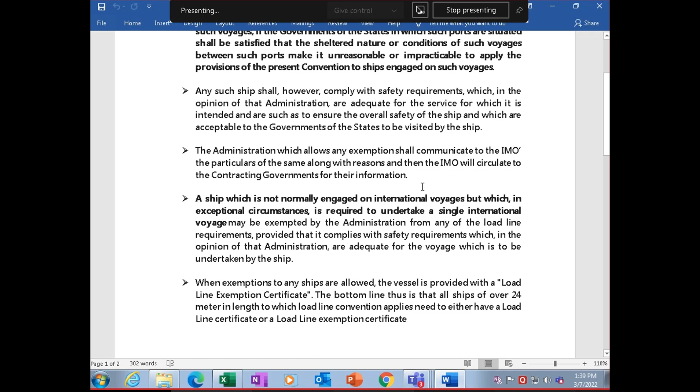A ship which is not normally engaged on international voyages but is in exceptional circumstances required to undertake a single international voyage may be exempted by the flag state from any load line requirements, provided it complies with the safety requirements which, in the opinion of the flag state, are adequate for the voyage which is to be undertaken by the ship.

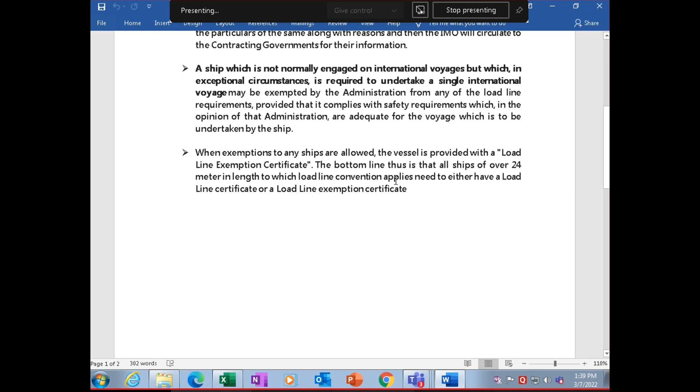When exemptions to the ships are allowed, the vessel shall be provided a load line exemption certificate. The bottom line is that ships over 24 meters in length, to which the load line convention applies, need to have either a load line certificate or a load line exemption certificate.

Now for the sheer, your formula is this one, sheer credit. When the sheer profile differs from the standard, the four ordinates of each profile in the forward and aft half shall be multiplied by the factors of Simpson's rule, 1-3-3-1. The difference between the sum of the respective products and those of the standard, divided by 8 measures, gives the deficiency or excess of sheer in forward or aft.

The arithmetical mean of the excess or deficiency in the forward and aft halves measures the excess or deficiency of sheer. So the sheer credit will be given by this formula: S equals Y by 3 into L dash by L. Here S is your sheer credit, to be deducted from the deficiency or added to the excess of sheer. Y is the difference between actual and standard height of superstructure at the end ordinates. L dash means enclosed length of poop or forecastle, up to a maximum of 0.5L, and L is the length of the vessel. So that becomes your sheer credit as per this diagram.

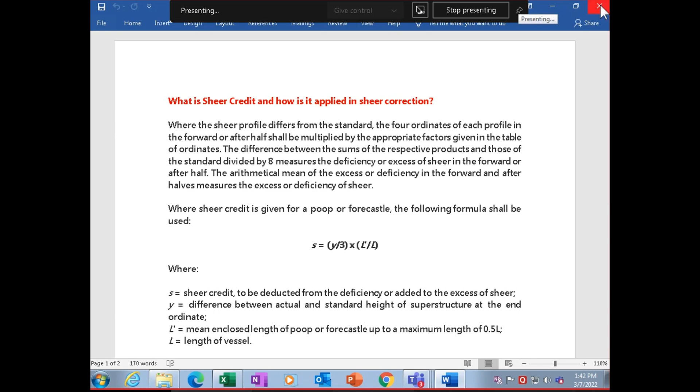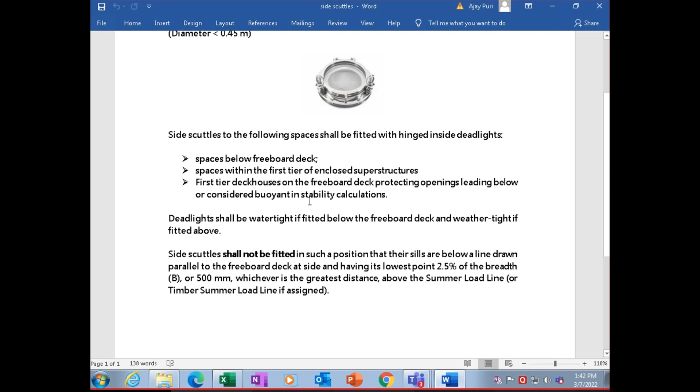And what are your side scuttles? This is defined as round or oval openings of area less than or equal to 0.16 square meters, with diameter less than 0.45 meters. Side scuttles are fitted with hinged deadlights and covers on top, for spaces below the freeboard deck, spaces within the first tier enclosed superstructure, and first tier deck houses on the freeboard deck protecting, with openings leading below or considered buoyant in stability calculations. Deadlights will be watertight if fitted below the freeboard deck and weathertight if above.

Side scuttles shall not be fitted in a position such that the sills are below a line drawn parallel to the freeboard deck at the side, with the lowest point being 2.5% of the breadth or 500 mm, whichever is the greatest distance above the summer load line. That's your side scuttle.

So your passenger...